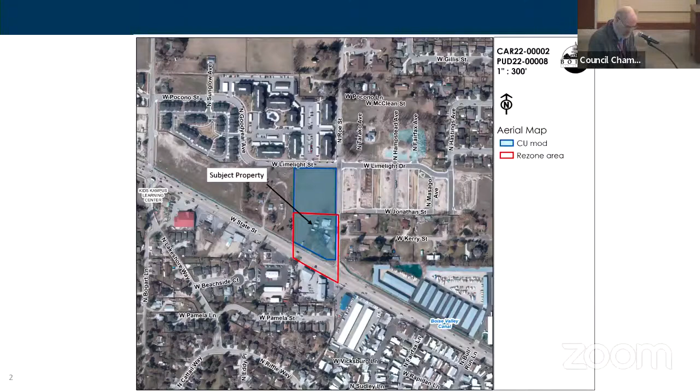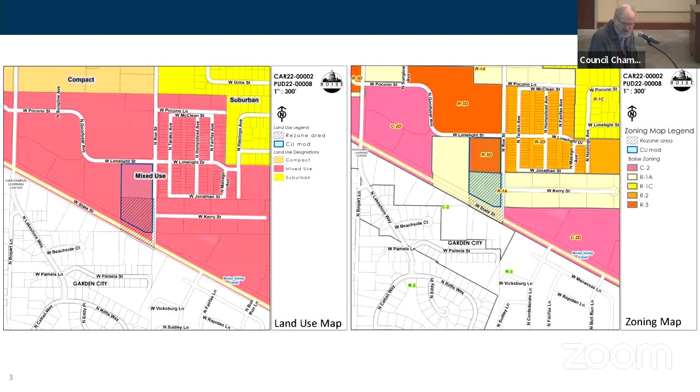As seen on the slide, the requested R3 zone is compatible and consistent with the surrounding neighborhood, since the adjacent properties are zoned R3 and C2 to the west, east, and north and contain apartments. The neighborhood to the south across State Street is comprised of commercial uses and zones within Garden City. The requested zone is compatible with the comprehensive plan as it designates the site as mixed use on the land use map, within which the proposed R3 zone is allowed and anticipated.

As you can see from this site plan, the development consists of two 3-story apartment buildings, with a density of a little over 36 units per acre. The apartment buildings are oriented toward Roe Street and State Street. With the recommended conditions of approval, the project will comply with all setbacks, requirements, parking standards, and will provide the required amenities.

In summary, all the required findings of the rezone and the PUD have been met. The main issue to be discussed with this project is pedestrian and bike connectivity with the surrounding neighborhood, in particular the condition of approval requiring the construction of a 12-foot wide multi-use path along State Street. This path has been identified within the State Street URD and the State Street Framework Plan, and is encouraged by the Northwest Neighborhood Association Plan.

Conditions of approval will require the project provide pedestrian and bike connections to the adjacent properties to the north and west, including connections to the multi-use path from the project. In addition, the applicant's site plan does show the multi-use path along State Street.

The other main point of discussion is the landscape buffer along Roe Street and whether to install a drainage swale within it. The applicant requests to install a drainage swale within the landscape buffer, similar to what was done to the north, proposing the same or a very similar design. However, the planning team recommends the drainage swale be located outside the landscape buffer.

The landscape ordinance discourages wet drainage swales from being located in landscape buffers outside of industrial areas. As such, the main concern the planning team has with locating the swale in this location is that it will detract from the pedestrian comfort along the street frontage, and putting the swale in there generally does not allow for the planting of street trees.

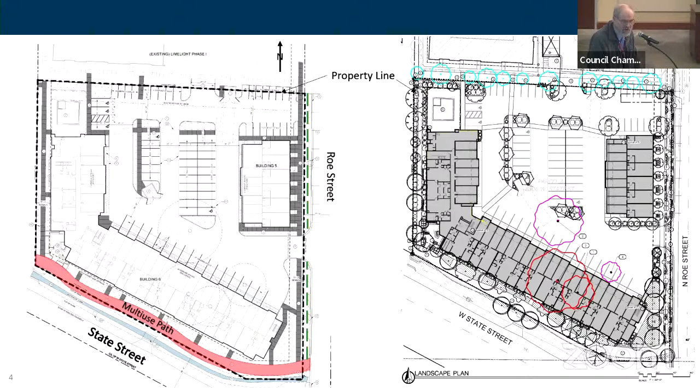The neighborhood association also expressed concerns with the project in terms of traffic, loss of trees, and the lack of current infrastructure to support the project, such as transit and pedestrian pathways. However, to address these concerns, I would note that the subject property is adjacent to State Street and was an integral part of the State Street corridor planning process.

This substantial planning process identified the subject property as a neighborhood transit zone, or TOD zone, which anticipates high-density residential along State Street with a future robust public transit system adjacent to the site. The loss of street trees on site will be mitigated per the landscape code.

Also, the neighborhood association, in their letter that you should have received, discussed the possibility of extending a temporary pedestrian pathway approximately 1,500 feet along the adjacent parcel to the east abutting State Street. However, the planning team did not consider this pathway construction as a condition of approval, since it's an off-site improvement and also due to the length of the path itself.

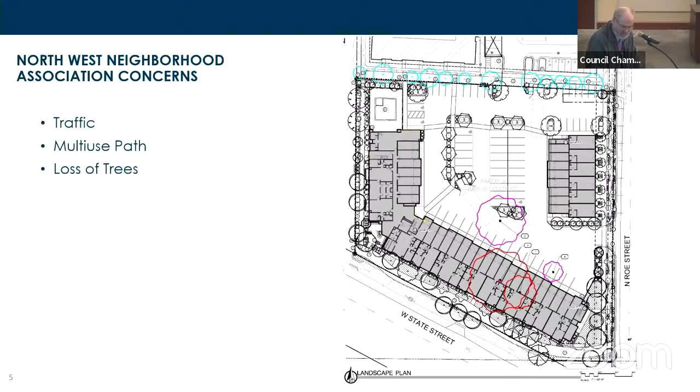In conclusion, the planning team recommends approval of the rezone and the PUD. Thank you.

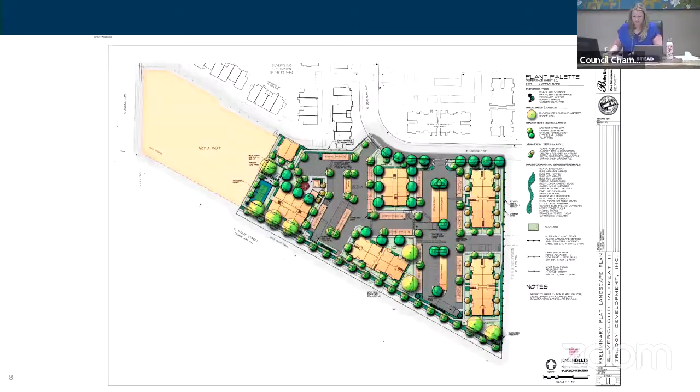I'm the managing development partner for Limelight Villages 1 and 2. My address is 5321 West Hidden Springs Drive, Boise, 83714. Thank you for the opportunity to testify before the commission this evening.

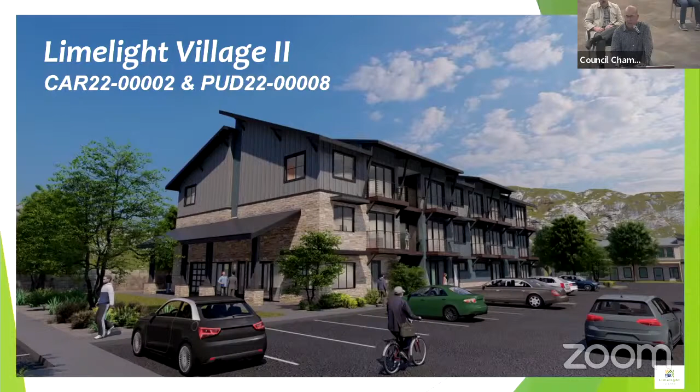I just have a few slides and I'd like to discuss some of the items that David brought up. This is a rendering of phase 1, our building 4, which gives you a sense of the architecture and the look and style of the buildings.

This is a combined site plan. This is a recent aerial photograph we took, which I thought would be helpful for context. Right now we're building phase 1, which is 85 units in 4 buildings. To the right you can see the subject site, showing the irrigation canal to the south along State Street, giving a sense of how things flow together.

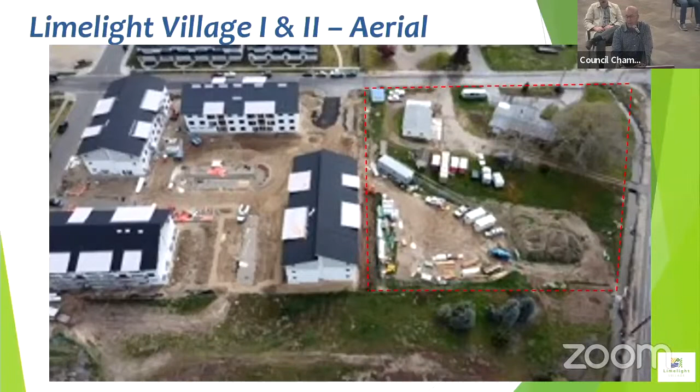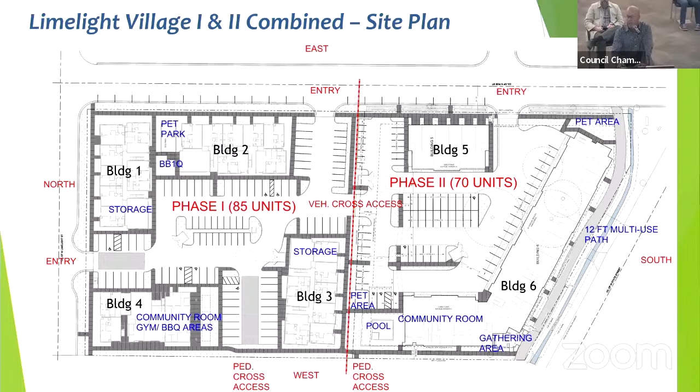This is the combined site plan, indicating the two sites. Some important pieces to note are where the entries are along Roe Street—a new entry on phase 2, an existing one on phase 1, and one on Limelight. The blue shows some of the amenities we've put into the project for our residents: community room, gym, pet park, pet areas, and we're adding a pool to phase 2, some gathering areas, and of course the 12-foot multi-use path, which we've agreed with staff to install. We've designed a meandering path at this point, but we can discuss that further.

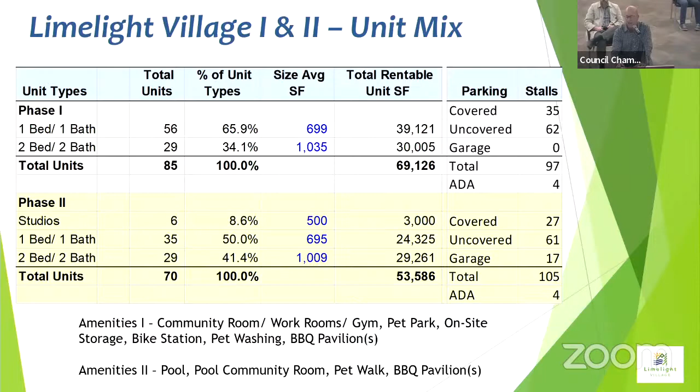This is a breakdown of the different unit types, 1 and 2 bedrooms, and we did add some studios to phase 2. This is just the site plan for phase 2, and we'll talk a little bit more about the multi-use path.

So for recommended condition approval number 10, we just had a note to that.

David, next slide please. You can see the blue here along State Street and where our meandering path is. Those areas just encroach slightly over our property line into the area that is part of the Canal District maintenance area and also the right-of-way for ITD. We're currently in discussions with ITD and we've completed our application. We've also been talking to the Canal District, and both have been positive about giving us an easement for those two areas. If we're unable to do that, we'll move it back onto our property line, but I thought the commission would want to know about that.

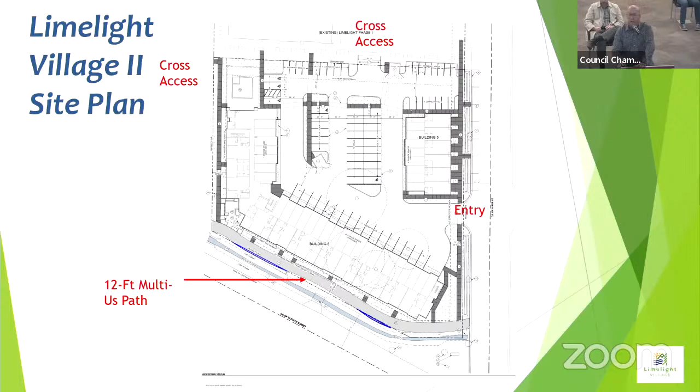Next slide. David mentioned that the neighborhood association, when we got approvals on phase 1, raised the idea of connectivity, trying to get pathways so that residents from the multifamily apartment area could get to some of the services. We agreed with them that we would help start conversations and work with CCDC to come up with a way to facilitate this path. We have been meeting with them. We actually engaged our civil engineer to do this drawing, which shows a design of a 5-foot multi-use path to connect Roe Street to the North Point Shopping Center, giving people better access to the bus stop and commercial services.

We've had probably 3 meetings with CCDC. We've informed the Northwest Association. We've agreed as the developer to front the cost for the walkway if they can get it approved, and then CCDC, through the Urban Renewal District, would reimburse us over the next couple of years. So we're committed to doing this, but we don't control it, we don't own the property, and the agencies really have to work together in order to get this approved. So we hope the commission wouldn't condition any of their approvals of the PUD and the rezone on that, but we're committed to doing it.

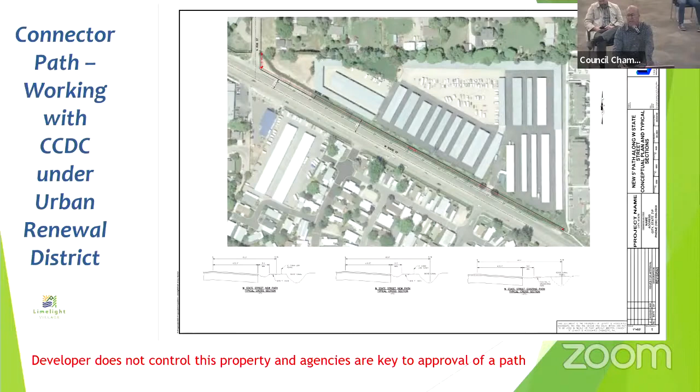Next slide please. Recommended condition number 7 — this is a request that we have to modify. Can we go to the next slide, David? Thanks.

So we have swales, as David said, on both of the street frontages on Limelight Village 1, on Limelight Street and Roe Street. We're asking the commission to approve this for the following reasons. First, phase 1 was approved by the city and ACHD, and we worked really hard with them to modify the design where we created some safety measures, and we agreed to comply with ACHD design and some of the city's requests. Secondly, there is high groundwater in the area, and it's challenging to handle stormwater drainage from the street, so this is a helpful way to do it.

There are many bioswales in place in the surrounding properties — I'll show you that in the next slide. ACHD has approved these swales for phase 2. They did have one condition: they do not want us to put trees in the swale this time. We do have enough room on the other side of the sidewalk to put the trees, and we've designed it that way. We know this isn't a general policy of the city, but this is the last section in this neighborhood, so it seems logical that the visual and engineering consistency should remain. Lastly, the Northwest Community Association, in a letter they submitted recently to David's staff, noted that based on our design for phase 1, we improved safety, convenience, and aesthetics.

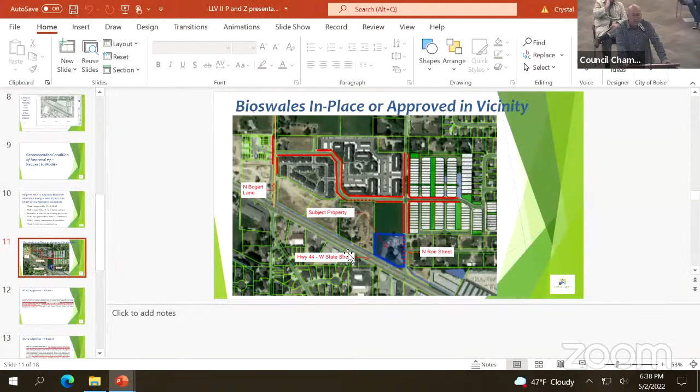Madam Chairman, Commissioner Gillespie: my second question was, what happens if the application as proposed is adopted, which prohibits you from storing stormwater in the swales? Where will you put the stormwater then?

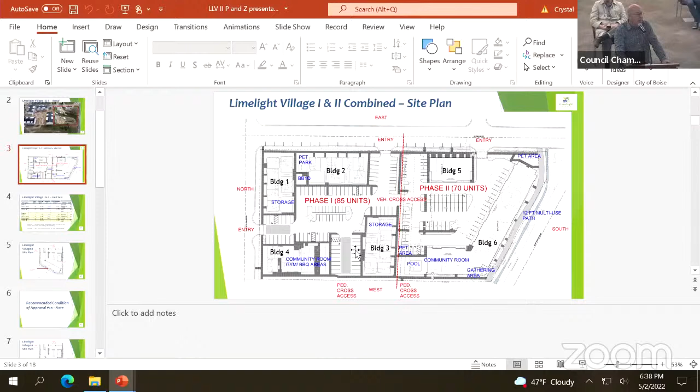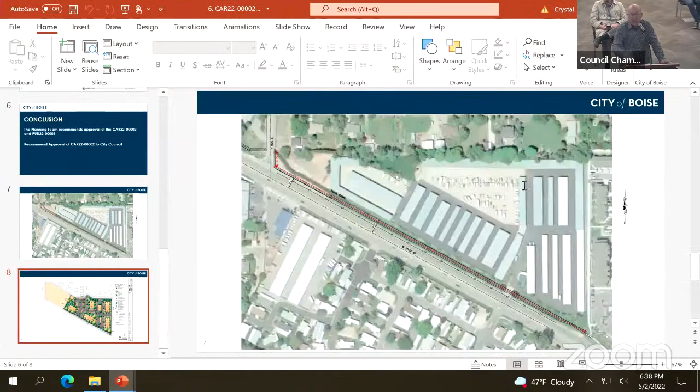Madam Chair, Commissioners, for us right now, what we're facing, even on Limelight Village 1, is increased construction costs. We're over budget for sure. We want to provide housing that's needed in Boise, and we've had some estimates on phase 2, but we know it's going to go up. The hardship it gives us is that we're going to have to put in more pavers and more of these drainage basins. It requires us to do earthwork, and we have to put these basins in. There's some, they're called storm tech drains, and it's equipment that we have to buy. So it basically costs us a lot more money to do it on site, and we have to change our plans on the site. It's more expensive for us to do it. Thank you.

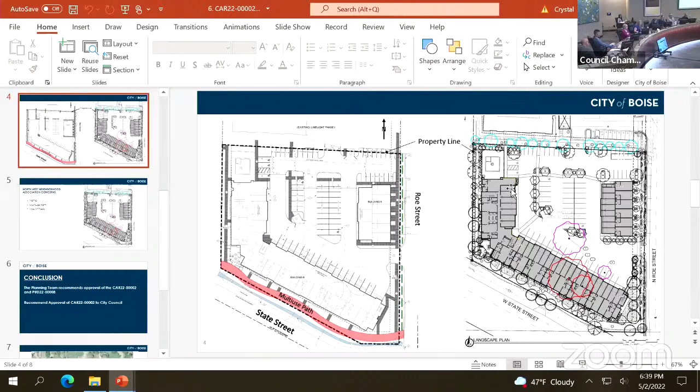It looks like no more questions from the commission, so next we'll move to public testimony. I do have one person that was signed up in advance, Claudia Friendsworth. Do we have Claudia either online or in person here? I don't see that name. So if you're on somebody else's computer, please virtually raise your hand so we can see there, or if there's anybody else that would like to testify on this item, please raise your hand or come up to the podium. Seeing none, then we'll ask for, it would be rebuttal from the applicant.

There hasn't really been any opposition at this point, but if there's anything else you'd like to say, now's your chance. Madam Chair, Commissioners, I just want to thank the commission as well as David. I think he's done a great job on the report. And I would just ask you to really consider the swale issue. It really does make a big difference for us in terms of the costs, and we think it really provides a consistent visual look. We do think it's going to meet all the requirements as well as meeting all of the alternative compliance requirements that the city has. We'll meet all of those requirements. Thank you, Mr. McCormick. Okay, with that, we will close the hearing and render a decision.

Madam Chairman, Commissioner Gillespie: where are we, item 6. I move that we recommend approval of CAR 22-2 to the city council, that we approve PUD 22-8 with all the conditions in the staff report except for item 7. I would replace the last sentence in condition number 7 to read as follows: the landscape buffer may contain drainage swales provided that they conform to the same general design standards as those previously approved to the north. Second. And I would just ask, sorry, we had a second from Commissioner Mooney. Thank you, go ahead Commissioner Gillespie. Madam Chairman, and I'd just like a nod that maybe from the applicant and the city that is sufficiently clear in terms of direction. So I'm seeing two nods.

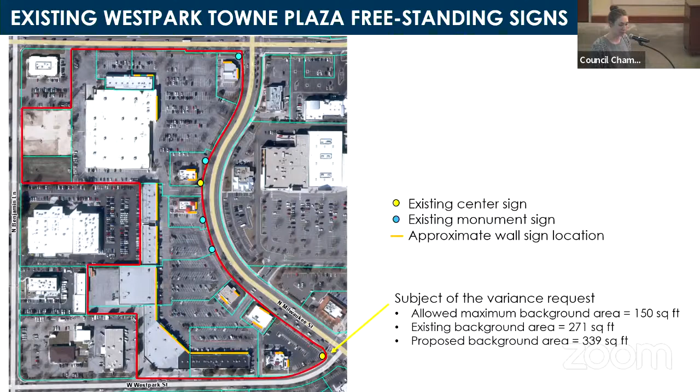Good evening, Madam Chair, members of the commission. The item before you is a request for a variance to exceed the maximum background area for an existing sign located at 513 North Milwaukee Street in a C2D zone. Signage for the Westpark Towne Plaza Shopping Center currently includes 2 center signs, 4 monument signs, and various wall signs. The existing center sign at the intersection of Milwaukee Street and West Park Street is the subject of the variance request. The development code allows center signs a maximum background area of 150 square feet. The existing sign was constructed with approximately 270 square feet, as allowed by a conditional use permit approved in 1989. The variance requested would increase the total background area to approximately 340 square feet. The applicant's letter of intent cites a past conditional use permit for a sign with 300 square feet of background area in this location as justification. The applicant also identified the curve in Milwaukee Street and large setbacks of the existing buildings from the street as factors making it difficult for passing cars to read the wall signs.

Concerns regarding increased online shopping and the COVID-19 pandemic's impact on brick and mortar retailers were also raised by the applicant. The planning team finds that none of the justifications provided constitute a hardship or exceptional circumstance. The request also conflicts with the comprehensive plan, which encourages a hierarchy of signs integrated with the overall character of the development. The proposed design would create visual clutter on the face of the sign, reducing drivers' ability to safely read it while passing by. The planning team recommends denial of the variance, and recommends the applicant reallocate the existing sign area or incorporate additional signage types to comply with the development code.

Thank you, Ms. Mortensen. Next we'll hear from the applicant. You'll have up to 10 minutes - please start with your name and address. Jeff Huber, 8385 West Emerald Street, Boise.

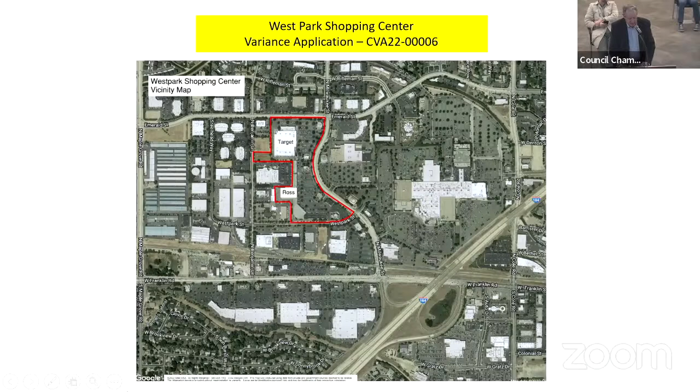Sabrina, could we have the first slide? This is an aerial of our shopping center, constructed in 1989 in conjunction with the mall. It's a large center consisting of 239,000 square feet, with 31 tenants on 13 separate parcels, and currently two center signs, four monument signs, and two pylon signs.

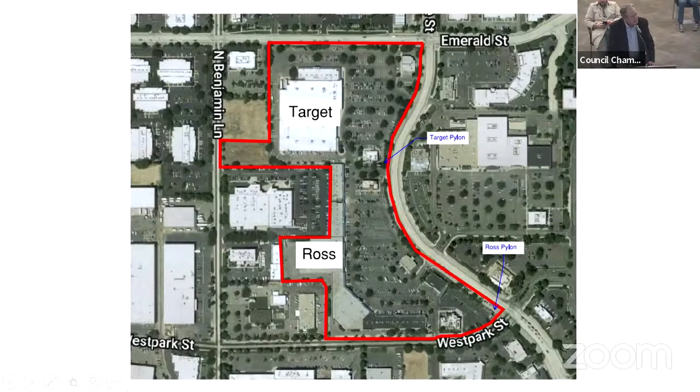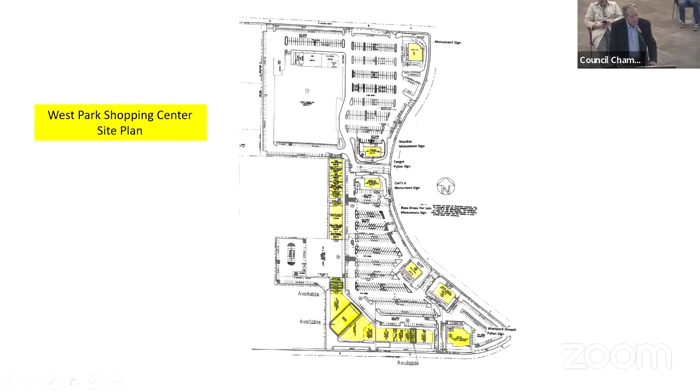Could I have the next slide, Sabrina? As you can see at that location - can we go to the next slide? There are 5 pads along Milwaukee Street, plus the Red Robin on West Park, which really blocks the visual visibility from Milwaukee Street, especially on the curve, because the driver's attention is focused on the curve. Could we have the next slide, Sabrina?

The second pylon sign, Ross, was constructed at the same time. They wanted half of the pylon, and they got it too, and they were happy to have that store in Boise. Boise was just starting to bloom in the national spotlight at that time.

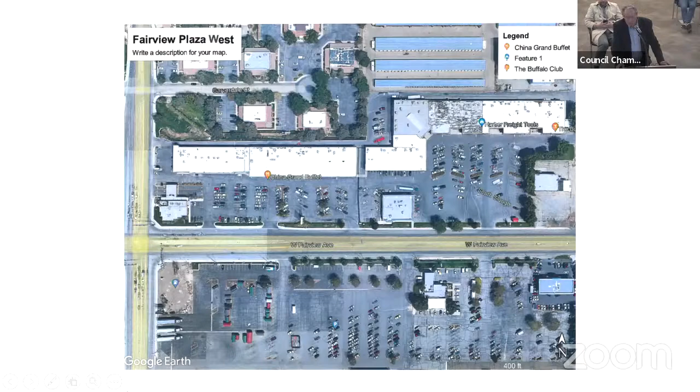Can we have the next slide, Sabrina? I'm going to give you 4 or 5 examples here of typical centers that are about the same size as ours, and they're all parallel to the street, and the streets are always straight. That is the Fairview Plaza West on Fairview, Eagle and Ustick. There's a number of commercial there. Canyon Plaza Shopping Center in Nampa. Former ShopKo on Broadway, and the shops on Milwaukee, just down the street from us. Those shops are only 150 feet from the sidewalk to the front of the shops, and only 60 feet for the Dollar Tree store on the end.

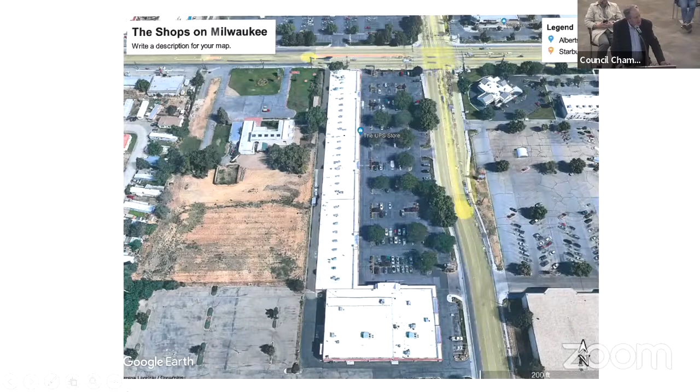Can we have the next one, Sabrina? So we're requesting 68 additional square feet for 16 tenants to just tag on to the bottom of that sign. It's the most effective spot for the signage to be.

There's already structure there, there's power there, and it's the most logical place for it to be.

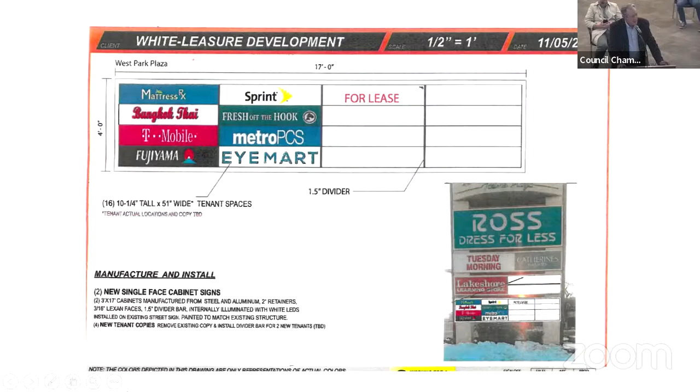But in keeping with the intent of the code and the comprehensive plan, they discourage clutter. And that's what we're trying to accomplish here tonight, is to not have additional monument signs cluttering up the street and the view from the street, but put it all right on that one pylon.

We have the next one, Sabrina. Oh, back up one. I've got to take a break now and let the other people that are here speak, and then we'll get to the rest of my presentation. Thank you, Mr. Huber.

Okay. Okay, so you're finished with your presentation? Oh, for the rebuttal. Okay, excellent. Perfect. Great. Thank you. Okay, great.

Is there anybody present to represent the neighborhood association? That would be the West Boise bench, Mr. Cockrell. Come on up. Please start with your name and address for the record. Yeah, Chris Cockrell, 10460 Saranac Drive.

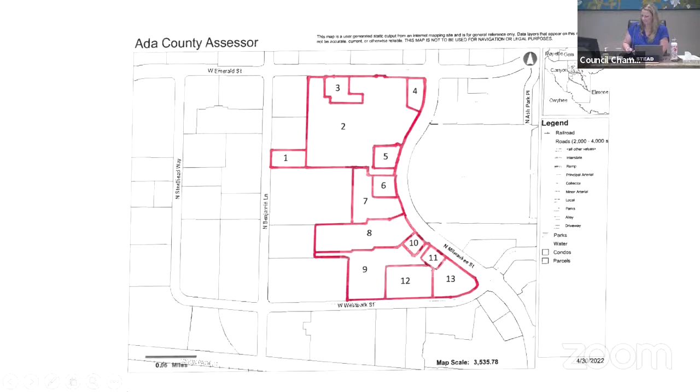Madam Chair, members of the commission, the landscape of the mom and pop brick and mortar tenants has changed dramatically since 1989, especially with the advent of online shopping. And online shopping accounts for 21% of all retail sales now in the United States and is growing by 2 to 3% per year. It's increasingly difficult for the small retailers to compete in a world with pandemics, mandated store closures, supply line interruptions, outrageous gas prices, online shopping, and next day delivery services that are free to advertise every

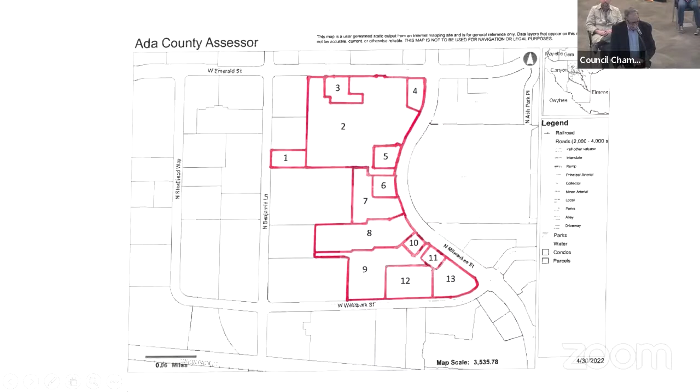If there are members of the commission that are thinking that if you approve this tonight, that you'd have to approve everybody else that comes before you for additional signage, that's not true. The code is clear that an applicant cannot point to a non-conforming sign as a justification for their application to be approved. So each application has to stand on its own. We think ours is unique due to the curve in the road. If you should choose to approve it tonight, based on a unique circumstance that creates a hardship, you'll be well within the parameters that the code is written.

So tonight we request that you approve this application and give these mom and pop retailers the boost up that they need to be competitive in today's retail world. Thank you. Thank you, Mr. Huber. Okay, with that, we'll close the public portion of the hearing, and the item is before the commission.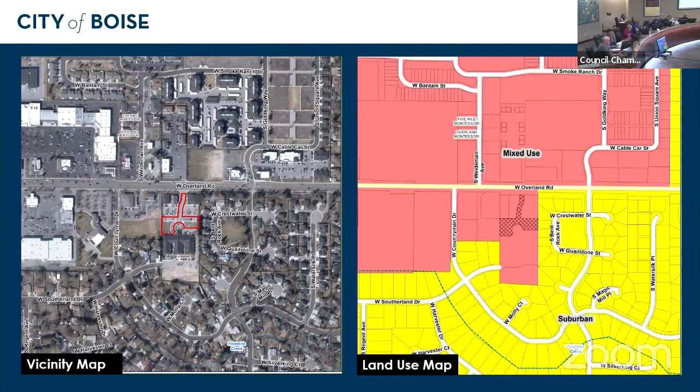21-66, a modification of a conditional use permit for a planned residential development comprised of 11 multifamily units on 0.87 acres located at 10145 Overland Road in an NOD zone. The subject property is surrounded by a mixture of uses such as offices, single-family residential, an assisted living facility, and a church, and it is located approximately a quarter mile southeast of the Regional Activity Center at the intersection of 5 Mile Road and Overland Road.

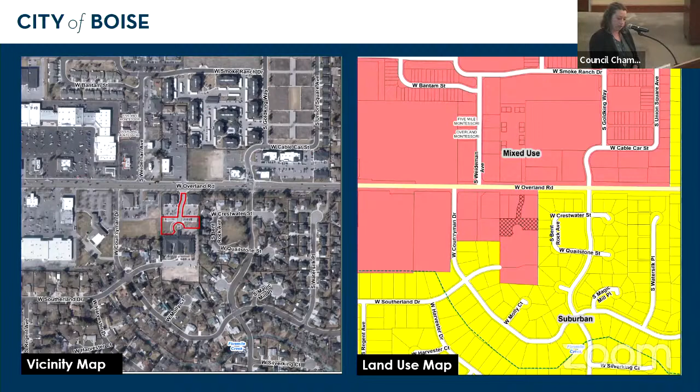There's extensive commercial development along Overland to the north, east, and west. The density in the NOD zone is 14.5 units per acre, and at 0.87 acres, this lot would allow for up to 12 units. The applicant proposes a 4-plex and a 7-plex for 11 units total.

The applicant plans to modify 2 conditions of the original CUP from 2008 that limited development to 1 story, but did not provide a height limit and called for a 15-foot perimeter setback to the east and west side of the parcel. The applicant proposes a 2-story 4-plex at 25 feet to the midline of the roof and a 7-plex at 31 feet to the midline of the roof on the 3rd story. The applicant also proposes to reduce the east and west setbacks to 10 feet, which is more in line with the development code.

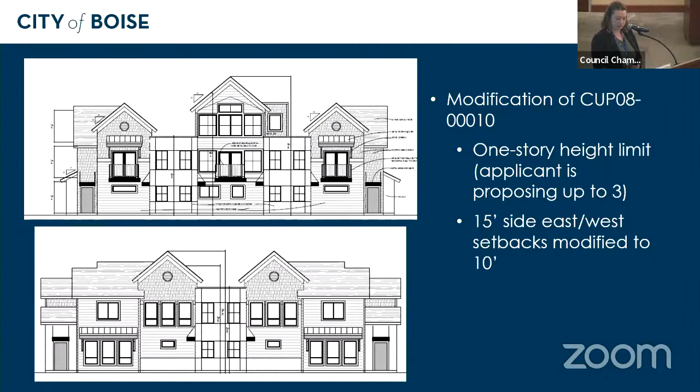This development is required to have 14 parking spaces on site, and the applicant is providing 18. The original development required a cross-access and maintenance agreement, but this was never recorded. A condition of approval will require that the access agreement be recorded prior to the issuance of any building permits. Additionally, the applicant will need to utilize the solid waste facilities abutting the common parking lot or provide their services on site.

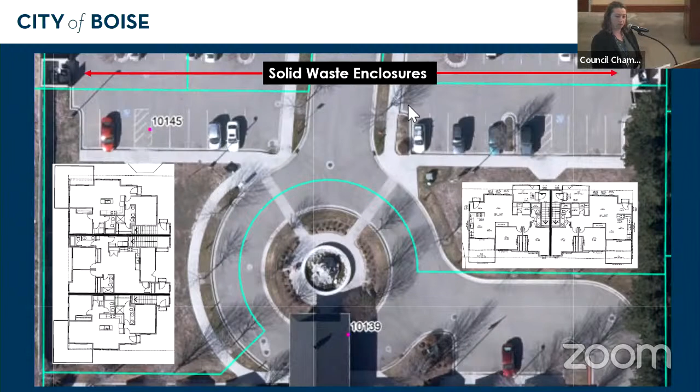Opposition to the project has been received concerning the height, hours of operation, parking, and lack of open space. While the applicant does intend to modify the height condition of CUP 08-10, it is not out of line with the underlying zone or existing development.

The NO zone allows for heights up to 35 feet. The office buildings along Overland are all at least 18 feet in height, and the assisted facility is approximately 21 feet to the midline of the roof. The tallest point on the proposed development is 31 feet to the midline and located in the middle of the building with step downs on either side.

The residential use should not negatively impact the hours of operation for existing offices, and the development is proposing to provide the 18 parking spaces on site when 14 are required. Additionally, the applicant plans to provide the 100 square feet of open space required by the development code in the form of private patios or balconies. In conclusion, the planning team recommends approval of PUD 21-66 with conditions, and I will stand for questions.

Thank you. Next, we will hear from the applicant. I see a hand up online here. Mr. Delgado, please go ahead. Start with your name and address. You'll have up to 10 minutes.

Hi, my name is Jory Delgado. I am with JBI Elemental. My address is 421 East Track Stand Lane. I'm going to keep it very brief on my end as the staff did a really good job presenting this project. I am in agreement with all of the approval criteria that was listed in the staff report, so I will leave it open for questions.

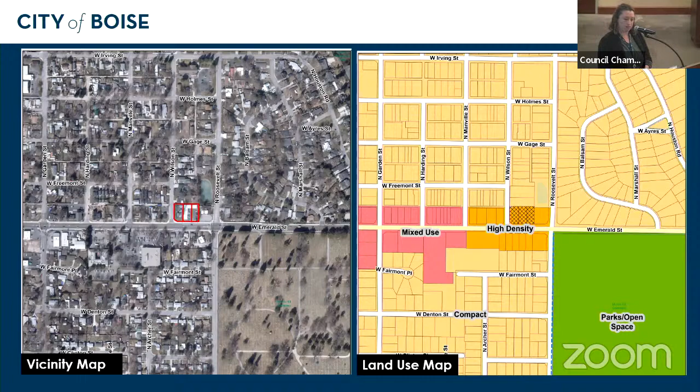Good evening, Madam Chair, members of the commission. The item before you is PUD 22-10 and CVA 22-14, a conditional use permit for planned mixed-use development comprised of 21 multifamily units and ground floor commercial space on 0.59 acres located at 4210 West Emerald Street in an R3D zone. The subject property is surrounded by a mixture of uses such as offices, single and multifamily residential, personal service uses, and a cemetery. The property is adjacent to the Emerald bus line with the closest bus stop under 100 feet away.

The property is also approximately half a mile east of the Orchard and Emerald Neighborhood Activity Center. The applicant is proposing 2 buildings with 3 live-work units on the corner and 18 multifamily units on the east side of the parcel. The applicant plans to meet all setbacks and height requirements aside from a variance to the parking setback on the rear property line, requesting to encroach 10 feet into the rear setback in order to maintain the existing parking and access point to the site off of Wilson. While normally this would not be considered a hardship or exceptional circumstance, the applicant is closing the access point off Emerald Street, and ACHD does not want the applicant to relocate the existing access point any closer to the intersection of Wilson and Emerald. Additionally, the fire department requires a 26-foot drive aisle for aerial access instead of the normal 22-foot drive aisle. The applicant also meets the requirements for a 20% parking reduction due to transit access and vertical mixed use development.

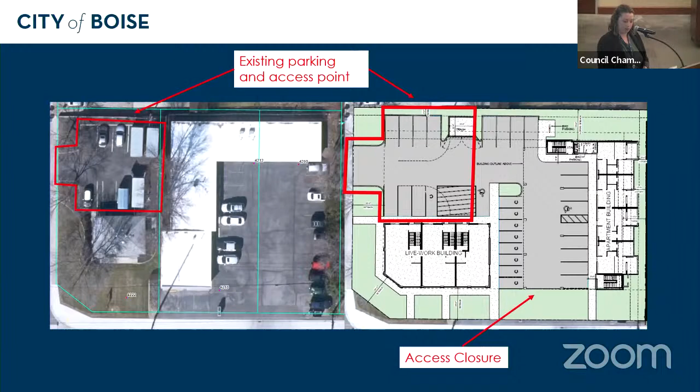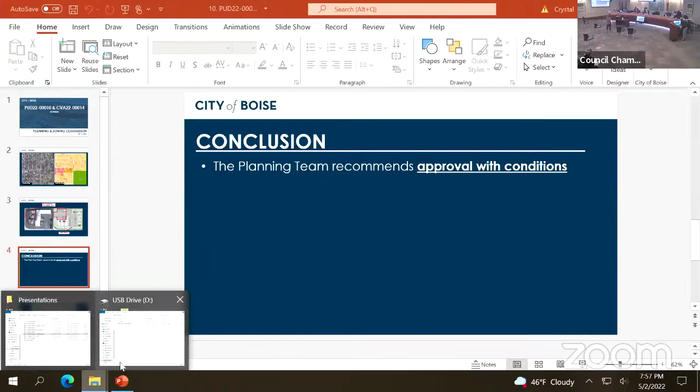In conclusion, the planning team recommends approval of PUD 22-10 and CVA 22-14 with conditions, and I will stand for questions. Thank you. Next we'll move to hear from the applicant. Please start with your name and address, you'll have up to 10 minutes. Thank you, Madam Chair and Commissioners. I'm Amanda Bidwell with EV Studio, 725 East 2nd Street in Meridian, Idaho.

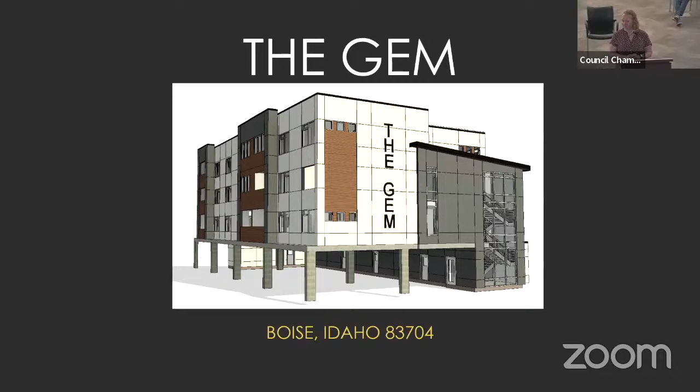So what you have before you tonight is the GEM, a development I've been working on with Tanner and Brady, who are here tonight. If you want to go to the next slide. As mentioned, this is on the corner of Emerald and Wilson. It's on the transit corridor. You want to go to the next slide.

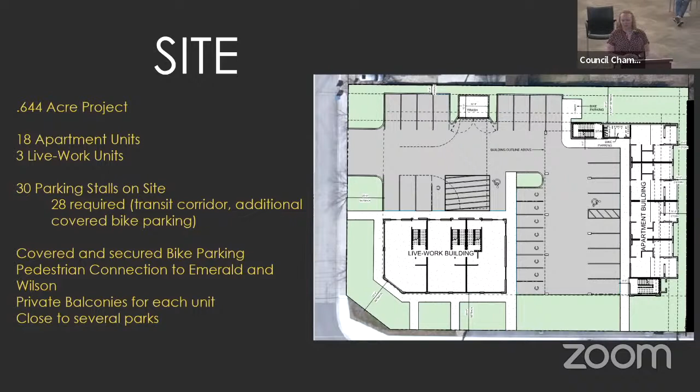This is our site plan, a total of 0.644 acres. We are proposing 2 separate buildings. In the southwest corner is a live-work building that would have 3 units with ground floor commercial and 2 stories of living space above. On the east side of the property there's an apartment building with 18 total units and some tuck-under parking. The dashed line outlines where the building is above, so those parking stalls on the far east are actually underneath the building. We are proposing fully enclosed secured bike parking within the apartment building for residents as well, and each unit has private balconies. We are close to several parks for open space requirements.

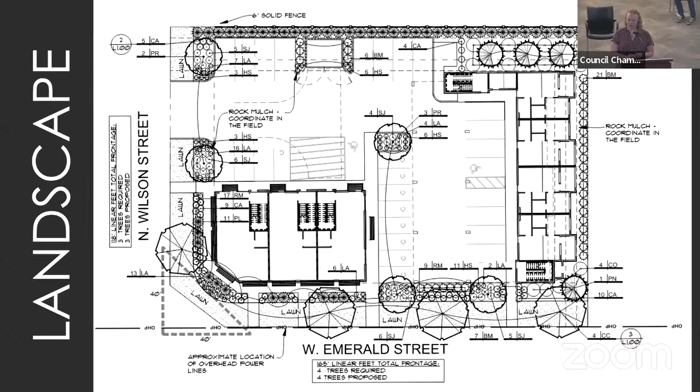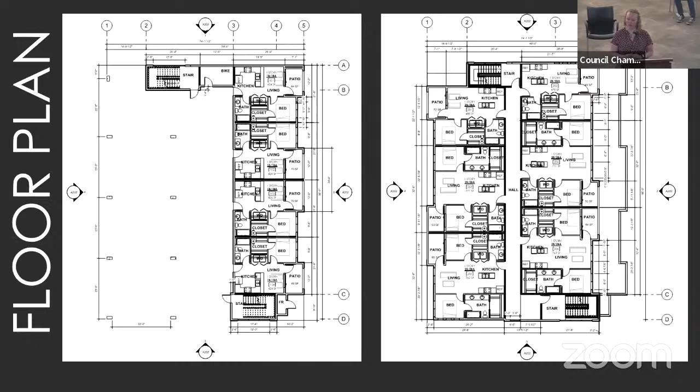Just briefly looking at the buildings themselves, this is the apartment building, 1st and 2nd floor. You can see it kind of steps back away from the property line to help with height, and has the tuck under parking there on the 1st floor. The third and fourth floors are the same units - they're all 2-story. On the third floor you see the hallway connecting those 8 units, and then the fourth floor is the second floor for those units.

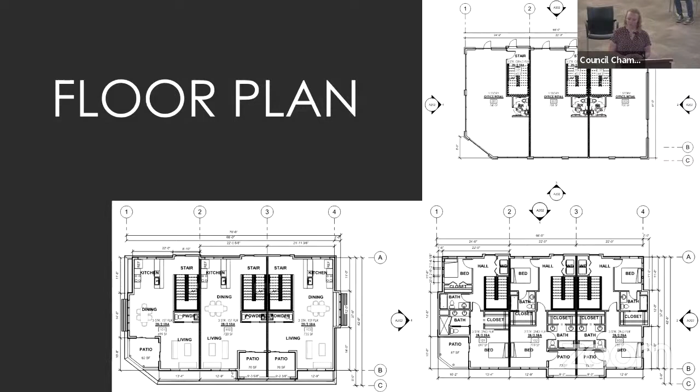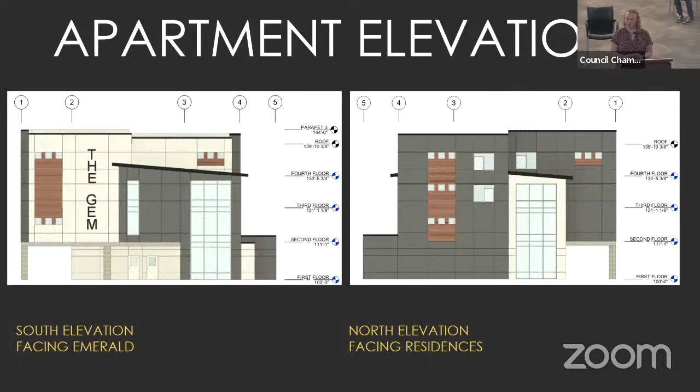The live workspace - you can see there the ground floor commercial, and then there's 2-story units above each commercial space. These are the building elevations, gives you an idea of what we're looking at here. It does fit in with a recently approved building directly to the east, similar style there. Next slide.

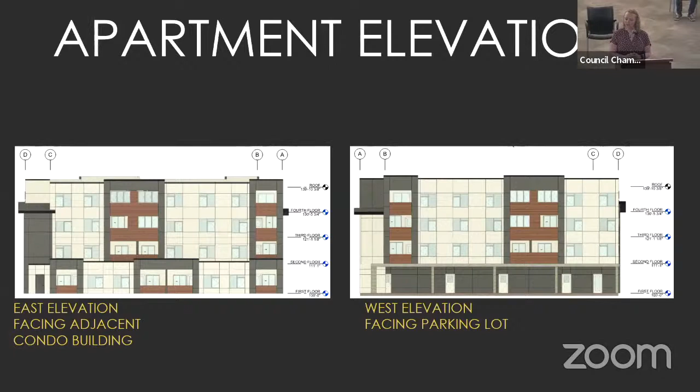Just some more of the elevations of the apartment. That west elevation faces the parking lot and the east elevation faces the building adjacent.

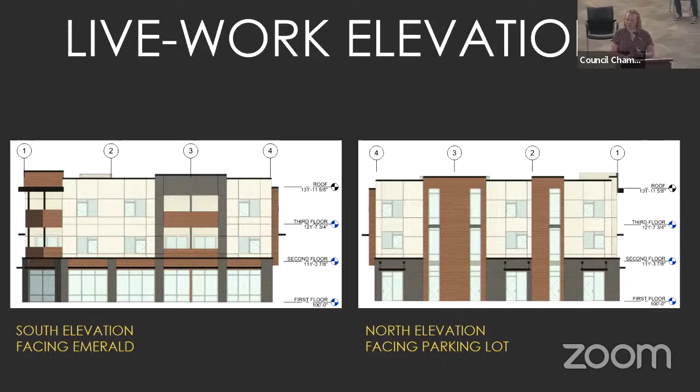Next slide - this is the live work unit. So that south side is what you would see along Emerald, and then the north side faces the parking. And then the east side facing Wilson, we would have spot for signage and addressing, and it faces the apartment across the parking.

So we do fit in with a number of the Blueprint Boise plans. We're providing a mix of housing and density where it's needed along a busy corridor. Tanner's been great about finding artists to help provide some artwork to fit in with the buildings as well. And because we are on the existing transit corridor, we're helping to reduce vehicle miles, and providing the commercial there with the live work also helps to reduce number of trips needed.

This is in the central bench. The land use map indicates the need for high density neighborhoods here, as well as a mix of housing types, which is what we're providing with the apartments and then the live work spaces.

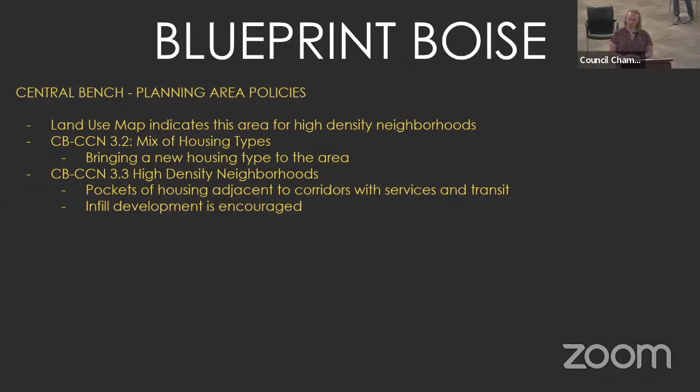Our variance request is to maintain the existing parking location. As Jesse said, we are dealing with ACHD - we've been required to close our access off of Emerald. As it stands, the existing access point is closer to the intersection there than is allowed by code by ACHD.

So that is the main reason for our request to the variance. Additionally, we are adding that landscaping there. This is the existing location of the parking, and there's an existing fence there, so we're just helping buffer some of the headlights and stuff from the adjacent neighborhood. These were the conditions of approval, and we're in full agreement with those.

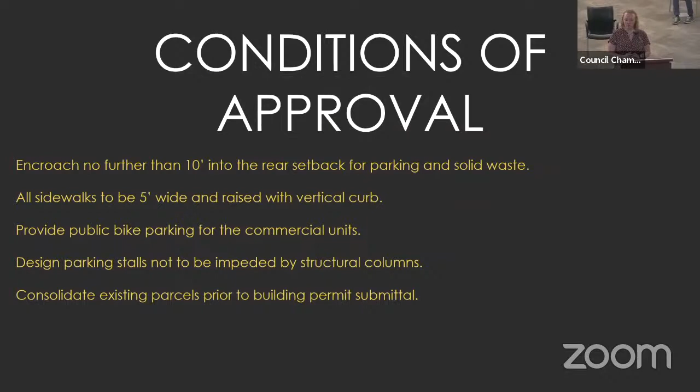And with that, I'll stand for any questions.

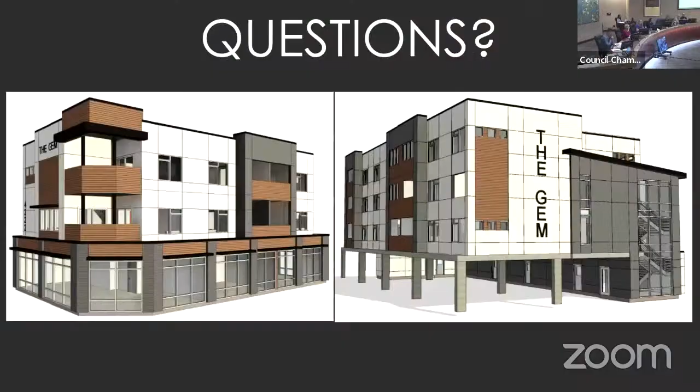Madam Chair, Commissioner Blanchard: just a quick question for the applicant. Can we go back to the presentation, the one right before this - the staff presentation, one before that. Okay, that's perfect. Amanda, where the compact parking spaces are facing Emerald, is it contiguous across? What do we have there from the corner of the apartment building? I can't move the mouse myself to show you the line of where the building is, but you can kind of see the building would actually stop at the edge of those compact stalls, so those would not be covered - that's to provide fire separation between the two buildings there.

Gotcha, okay, good enough. I promise Commissioner Squires I'd keep it short.

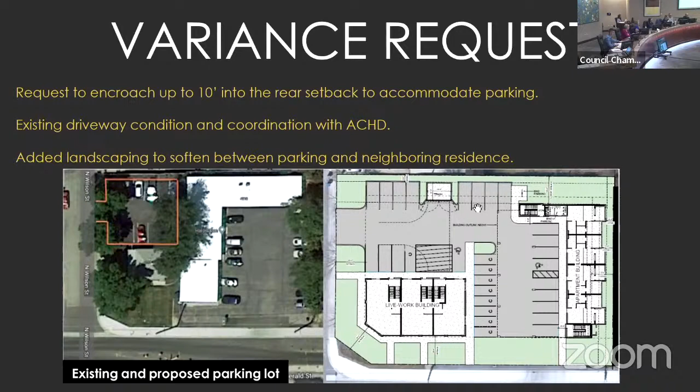Madam Chair, Commissioner Mooney: could I get this last staff slide? And I got a question for the applicant - so the friction in your design discussions as you started this was right there, correct? It was either ask for a variance from the city or quote unquote a variance from ACHD. Was there any collaboration between staffs on that, or did ACHD just say close the Emerald Street entrance? Madam Chair, Commissioner Mooney, my understanding is that the city requested Emerald to be closed and the ACHD was agreeing with that.

So as the city, we're basically - as one of the opposition neighbors said, where the neighbors to the north will bear the brunt of the impact versus traffic on Emerald will bear the brunt of the impact, is kind of where we are. Might that be too simplistic for the staff?

Madam Chair, Commissioner Mooney, I think that the closure on Emerald was essentially because it is a very busy street and that access point is close to the intersection. Plus they also had the option of taking access from the less busy street, which is what we typically like to see.

Madam Chair, Commissioner Mooney. So the current driveway, the current access - what's the differential between current use and projected use? For either one of you. You see where I'm driving with this: I hate for ACHD to drive land use decisions in this case. As a planner, would you have been able to develop a quality product with Emerald Street access? Would it have been better or worse?

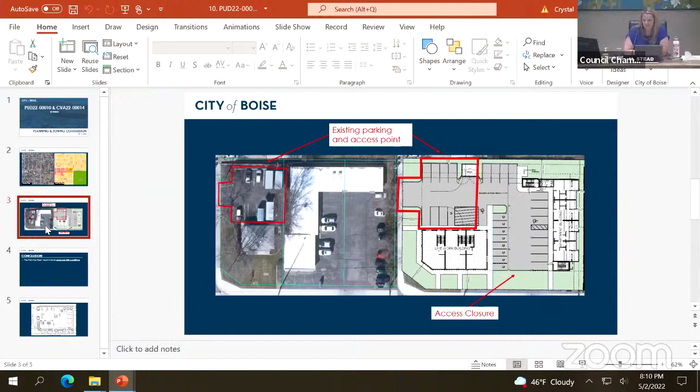Thank you, Kevin. Is there anybody else that would like to testify on this item? Please come on up or virtually raise your hand. Okay, seeing none, then we would ask for rebuttal.

You can have up to 5 minutes. Please state your name again for the record. Sure, Amanda Bidwell here with EV Studio.

I understand that parking is always a concern on these new developments. We are required to have 28 stalls and we are showing 30 right now, so we're doing our best to get as many on the site as possible to help mitigate that. As far as height and density go, we are fitting in with some of the surrounding developments that have been recently approved as well.

Also, to comment again on Commissioner Mooney's point, while having an access point onto Emerald would have been beneficial, I do agree with the city's recommendation to close it because it is a very busy road right next to several intersections there. Thank you, Amanda.

With that, the public hearing is closed and the item is before the commission.

Madam Chair, Commissioner Blanchard: I move that we approve PUD 22-10 and CVA 22-14 for EV Studio with all the terms and conditions in the staff report. Second, from Commissioner Danley.

Is there any discussion? I appreciate the members of the commission hearing this. I was the one that requested to hear this, and I'm glad that Ms. Bidwell was able to walk us through that and clear up some of my confusion on it. So thank you. Thank you, Commissioner Blanchard.

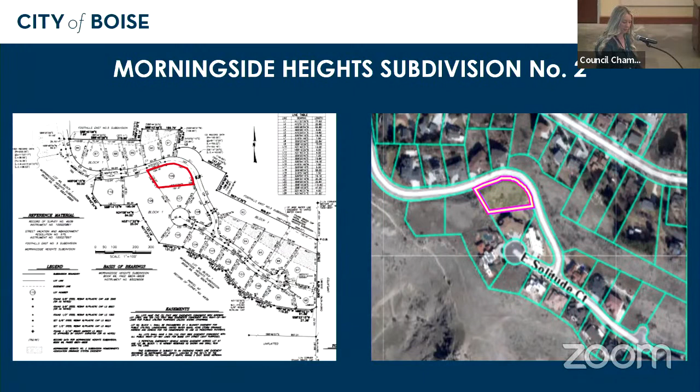On February 22nd, 2022, the planning director approved a Category 2 Hillside and Foothills development permit for a new single-family dwelling. And on March 4th, 2022, an appeal was received and filed by the respective neighbors.

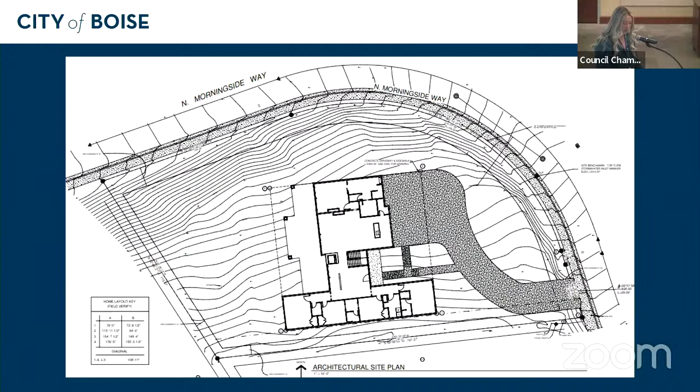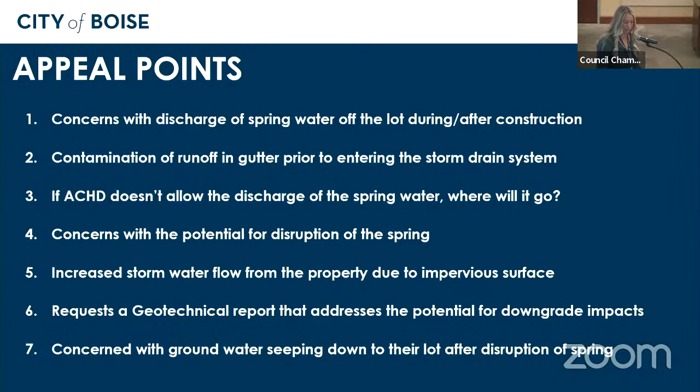In conclusion, staff recommends denial of the appeal and upholding the planning director's approval. I'm available for any questions, and I'll note that we also have Kane Schaefer and Jason Taylor from Public Works available online to answer any questions as well.

Thank you, Ms. Garlick. Okay, let's move first to the appellant—to the applicant, and then we'll hear from the appellants. Is the applicant present? Should be online.

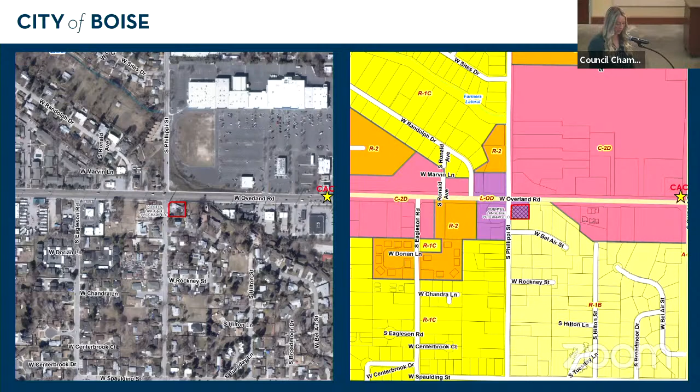The site is currently developed with a vacant commercial office building, originally constructed as a single family home in 1954 and converted into office in the 1990s. The property is situated at the southeast intersection of West Overland Road and South Phillippi Street, with Valley Regional Transit bus route running adjacent to the site and a bus stop located directly west. There's a mix of uses in the general neighborhood, including residential, commercial, and recreation. Less than a quarter mile to the east is a community activity center at Overland and Orchard, with the Hillcrest Shopping Center just north of the site.

The proposed project includes renovating the interior of the existing building to convert it into a residential group home containing 8 bedrooms, 2 bathrooms, a laundry room, and shared living with shared kitchen facilities. Minor exterior improvements are proposed with the structure remaining largely unchanged. The standards of the proposed structure and on-site parking meet and exceed all setbacks and development standards of the LOD zone. As proposed, the use is not more intensive than what is allowed or conditionally allowed in the LOD zone.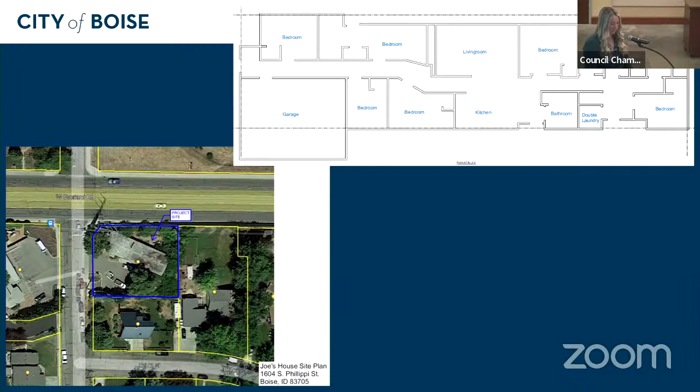The element of the proposed project that triggers the need for this conditional use permit is the conversion from office to residential. The proposed use is compatible with the uses in the general neighborhood and is large enough to accommodate the proposed use with all dimensional and development standards being met. The proposed project complies with the comprehensive plan because it is located at an intersection of a major transit corridor, adjacent to public transit and near a community activity center, which is within walking and biking distance to employment, education, amenities, and services.

Public comments were received during the review period as well as late correspondence. These concerns were expressed regarding the location, incompatibility of the use, and concerns with safety. Additionally, there was a request to defer this item in order for the neighbors to get more time to get feedback from Idaho Power and a previous tenant of the home. Staff found that this project is compatible with the comprehensive plan and meets all the required findings for the CUP. Staff recommends approval and the motion needed as a final action. I'm available for any questions.

Thank you, Ms. Garlick. Great. Next, we'll hear from the applicant.